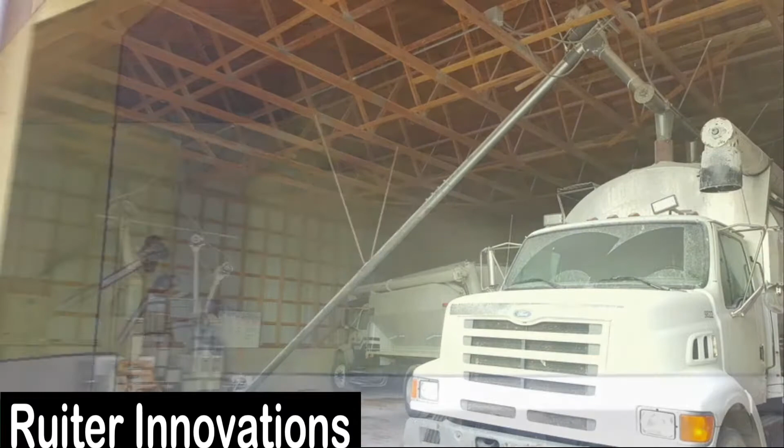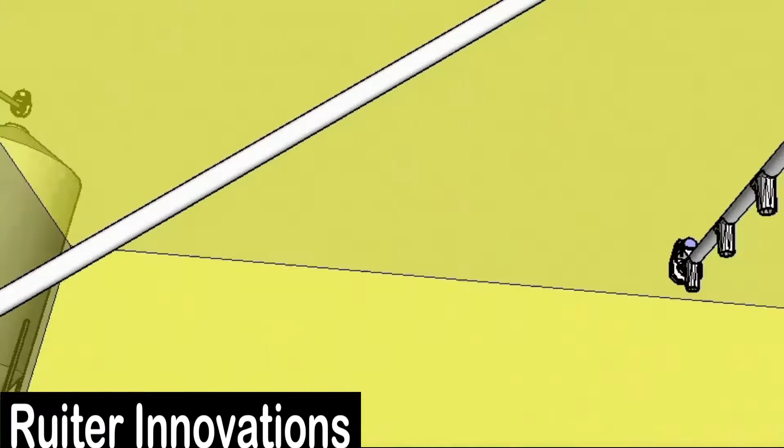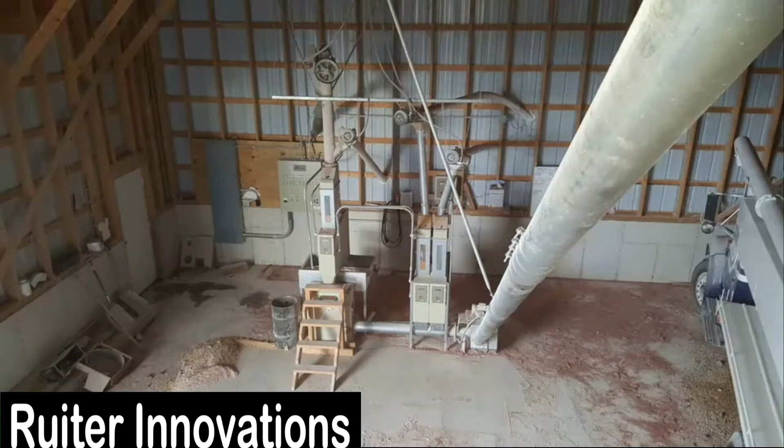Currently, we're feeding about 24,000 head a year. As far as the mill, I have a 6-inch system. If you counted every hour in the week, it's probably only grinding 30% of the time. You can process or set this mill to grind 24/7 if you'd like to. So I have room to expand, but at this current thoughts are we're not going to expand anymore.

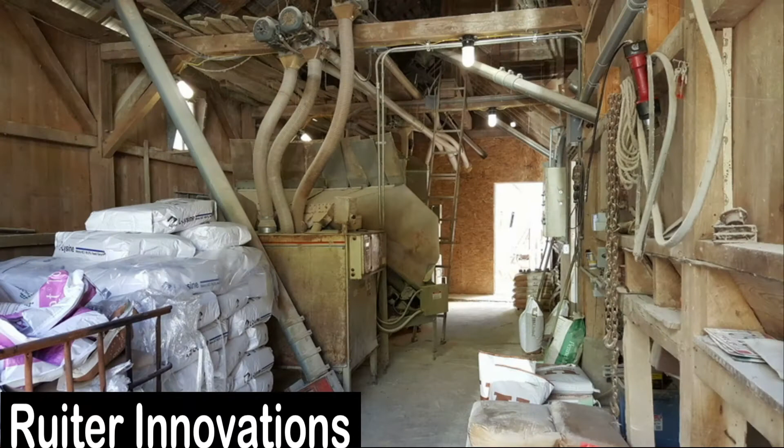If I was going to expand, I'd still stay with the system. There's systems that Larry's told me about where they have another batch mixer ahead, which saves a lot of time alone right there. Or you could go to an 8-inch system, and I couldn't imagine how much feed you could grind then. But currently it's more than what we need.

And it's one person who can take care of it. You can set the mill knowing the ingredients are going to fall into place. In my situation with 4 bulk bins in the truck, I can and have done it - set it for the weekend and come back Monday morning with 46 ton ground and ready to be delivered. What's nice about it too is I can plan my day.

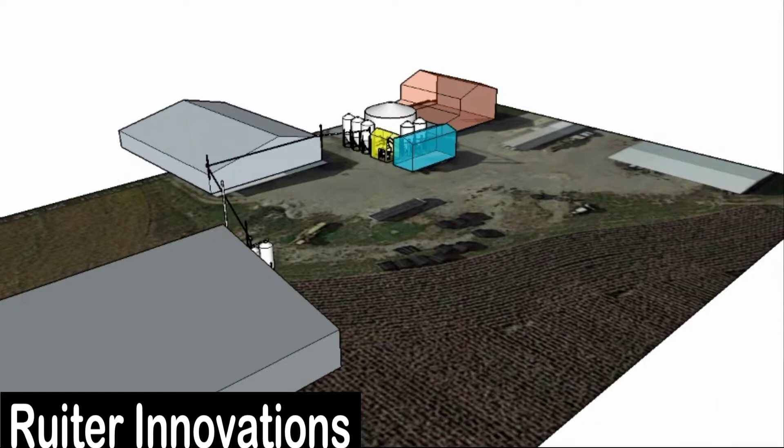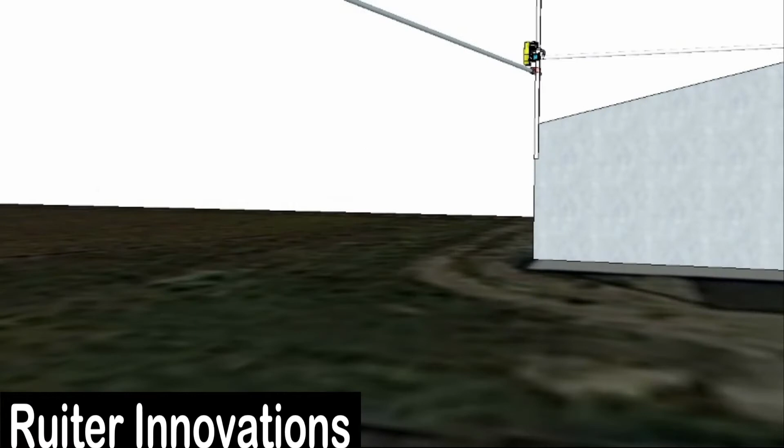We farm, raise cattle, and crop farm, and whatever variables come up, you can adjust. You can adjust ahead of time, and it's very flexible. You have options to do those things. And one person does it.

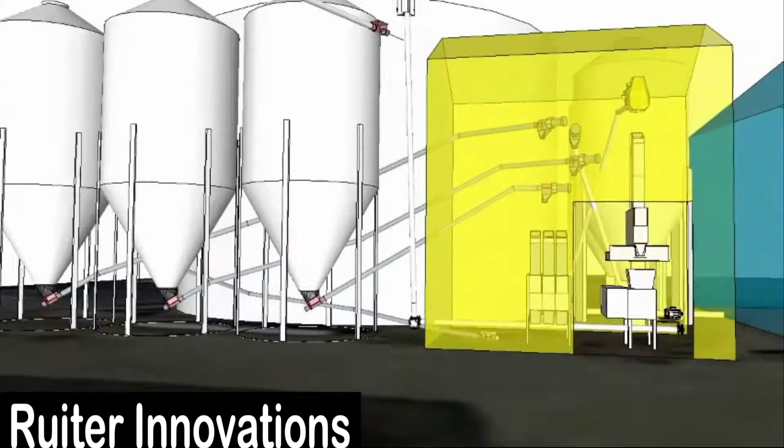I do most of it, but pretty much everybody that helps us on the farm, they know if they got a problem they can call me if I'm not around. I can walk them through it. So it's a one-man system.

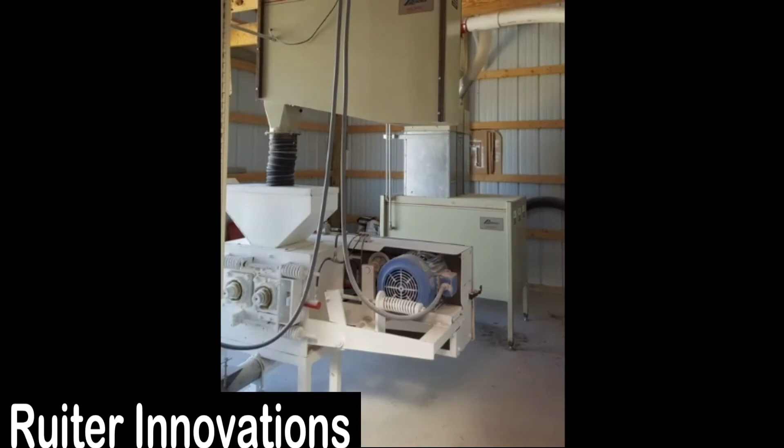How many people would it take if you didn't have a system like that? Well, before we've had one of these systems at another farm. It was a 4-inch system. At that place we probably fed about... at that time we didn't have near as many hogs. That ground probably, for sows and everything, we fed out 3,500 to 4,000 pigs on that site, but we expanded over the years.

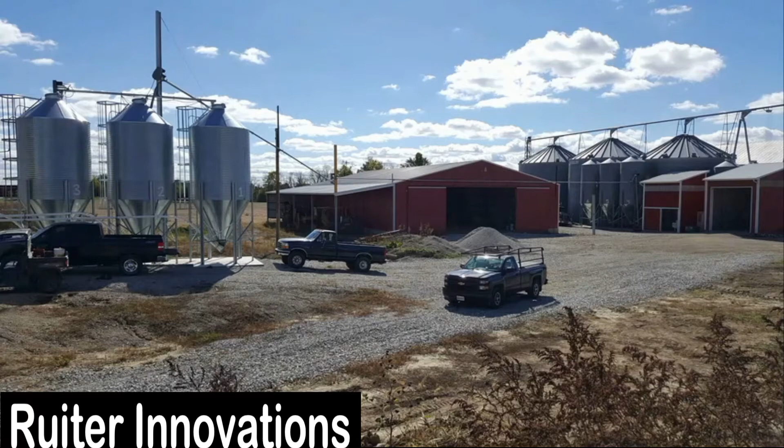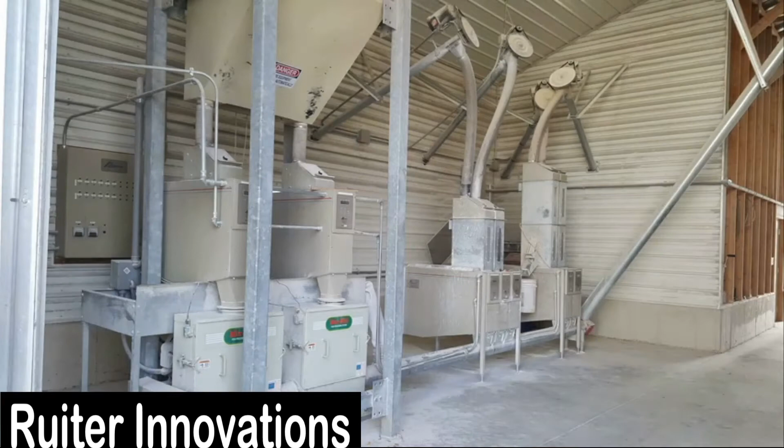We had a portable mixer mill at 2 other places, and another electric mix mill at another place. We just brought it all to one site and consolidated, and instead of 3 or 4 people doing their chores and grinding feed, it's all getting done. Can be done by one person. You just can. You can set it.

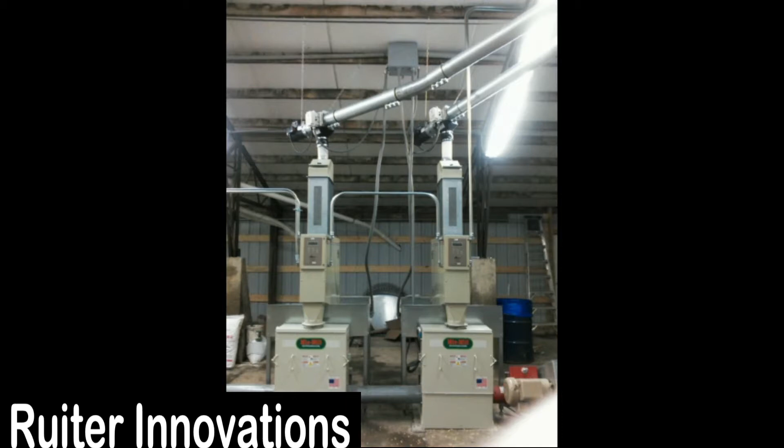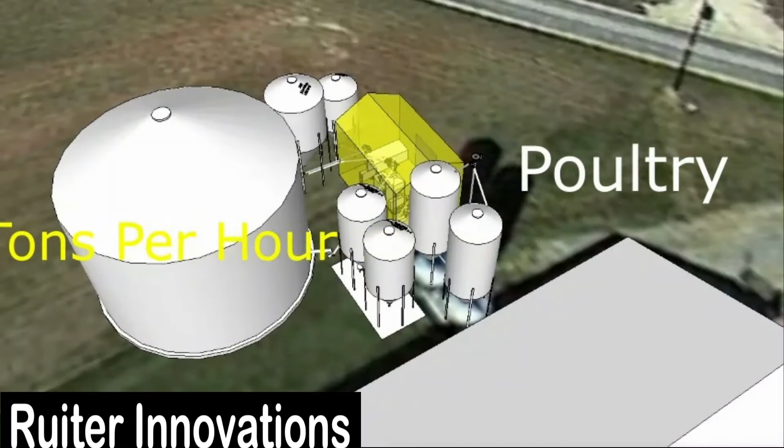What's nice, you can set it to grind, and you leave, and it grinds when you're away. I have a program on my phone, PC Anywhere, where you run your computer. Even when I'm dumping feed, I'll check and see if this grinder or something hung up, and I'll call one of the guys to go in and fix it so the thing can keep grinding. So that part is really efficient.

As far as reliability goes, how reliable is the system for you? Very reliable. Electronics on it, I don't really have much trouble with any of it, other than the fact that probably the biggest thing I have is usually when I have an electronic or computer glitch, it's operation error, which is me - I made a mistake and it walks me through to fix it.

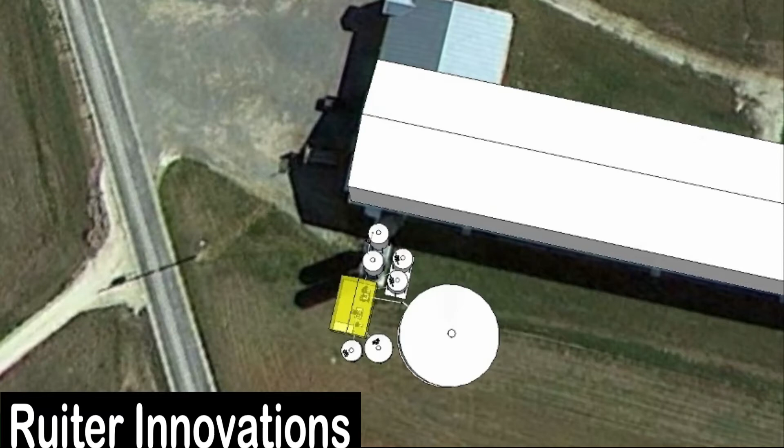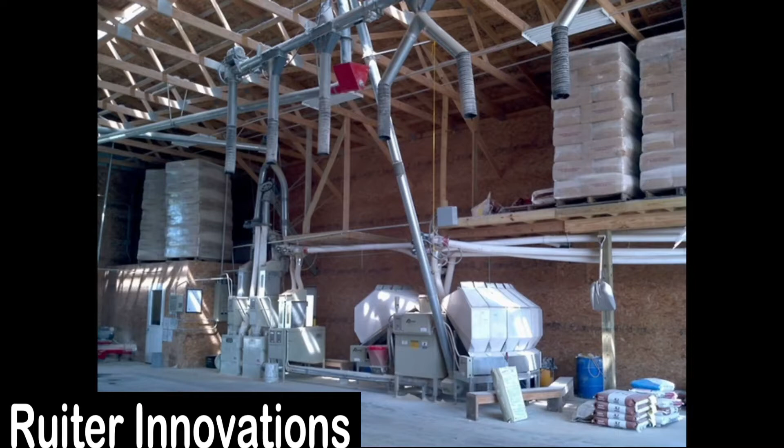And all weighed and accurate. My check and balances - I've got 4 bulk bins with a scale on them, and that's my check and balance. It comes out very close. I'm very happy.

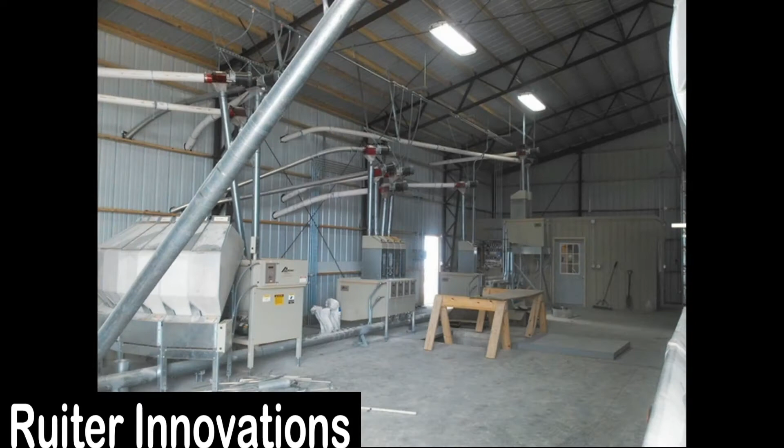As for consistency of the feed, I've been challenged on that by a nutritionist, and we tested it. We got the feed at the beginning, the middle, and the end, and he had to bite his words. So I think it's just as accurate, if not more accurate, than a ribbon mixer.

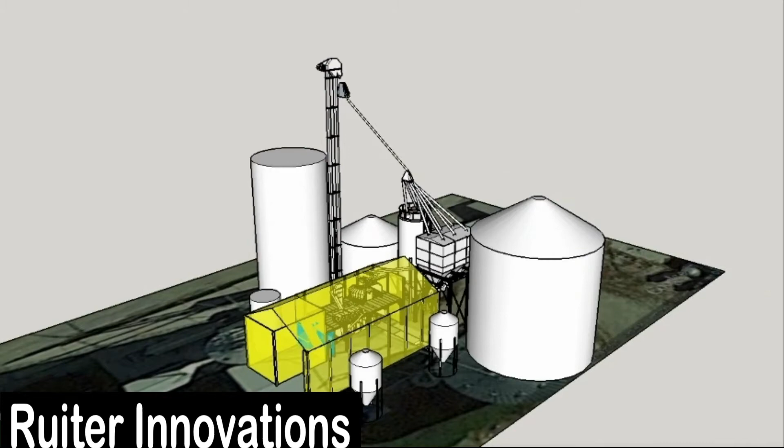And to put a system together like this, you're going to spend far less money than you will on a ribbon mixer system.

Excuse the phone. Sorry about that.

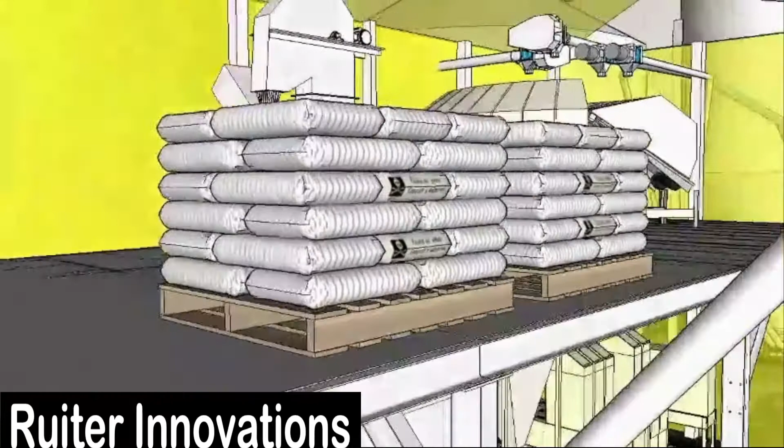But anyway, where did I go with that? We lost my train of thought. How much would you spend on a different system versus this one?

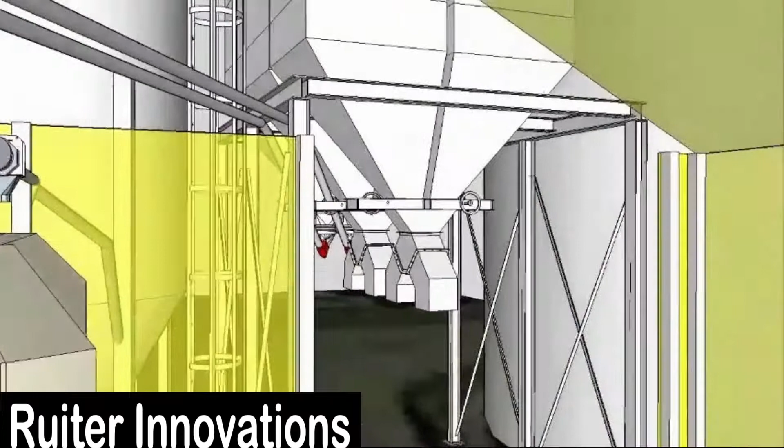Oh, you just would spend a lot more money because for one thing you got to grind all your corn ahead. You got storage, or the corn is all ground ahead, whatever the case.

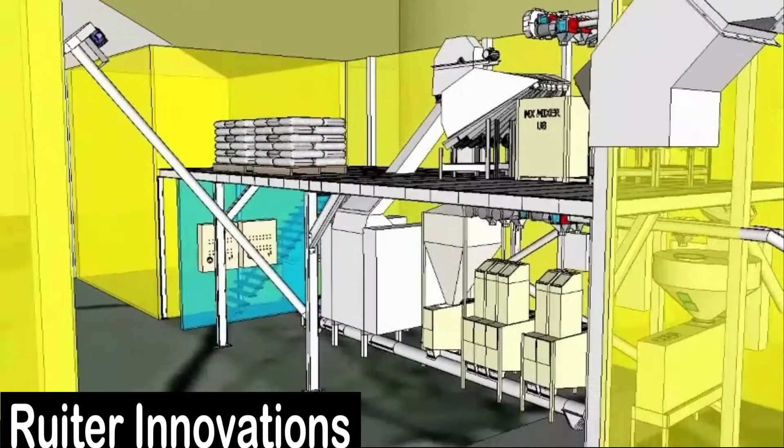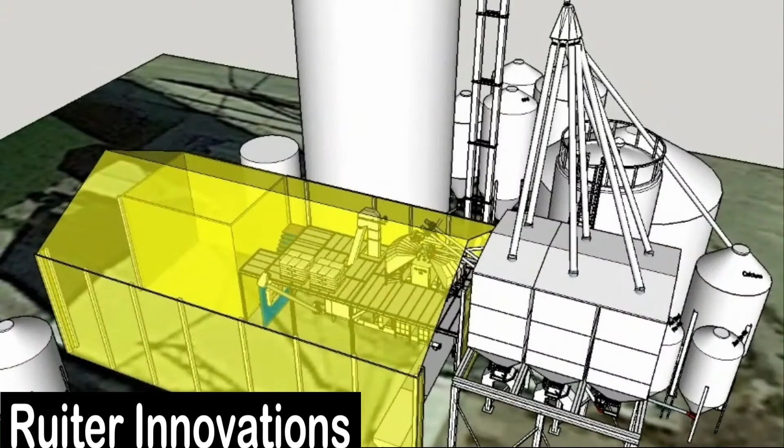And systems are either a roll or a hammer mill. I don't know, I just think a hammer mill's okay if you keep the hammers up and keep the screens up. The other feature I like about it too is it has a help me out, Jeff, what do you call that?

But it has that constant - once you set the mill, say if you're going to set it for 5 ton an hour, all your ingredients and your mill capacities ramp up, and the mill is always running at what I want to set at, which is around 30 amps, and that creates a very, very consistent product from beginning to end. Versus having a ration where the mill isn't running full, the corn is just not ground as well, I don't think. It just works better full to get a better product.

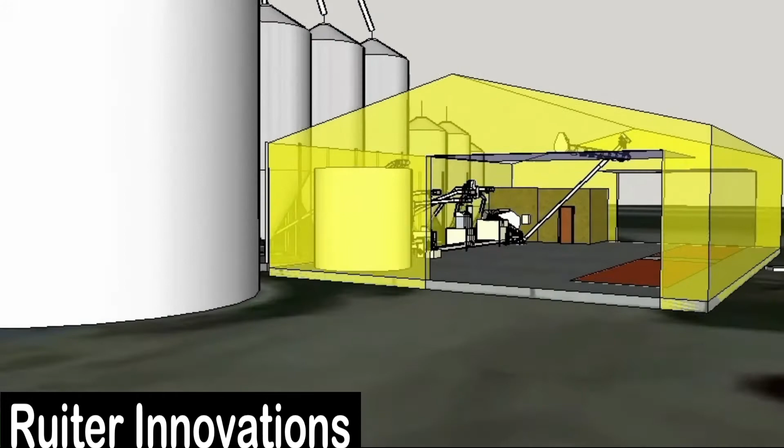Yeah, better continuous consistency. Consistency I think is very good. I feel it's very good. I just don't think the consistency of a ribbon mixer is as good as that. I've seen them both.

I've seen feed in ribbon mixers, and I looked at the final product, I just see separation in the feed. Whereas this is all getting mixed as it's dropped in and going across the auger, and it gets mixed when it's delivered, but it's all mixed right there because of the time it's going to the distribution auger.

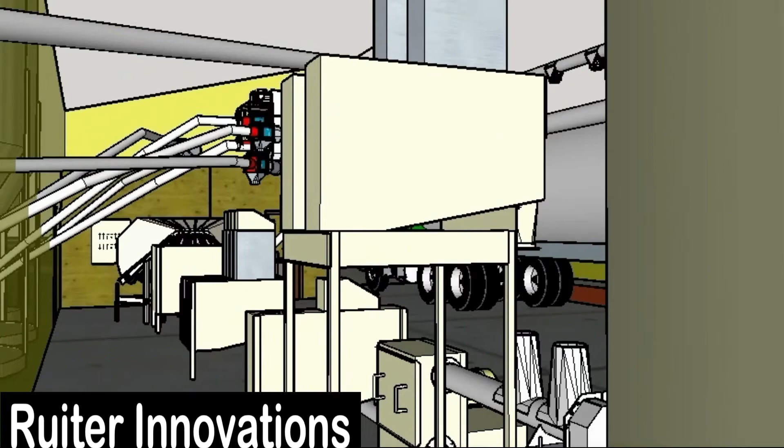That's what sold it to me when Larry Feynman sold it to me, the salesman in Indiana. Him and Larry came out too. I mean, they just sold it to me with those products right there.